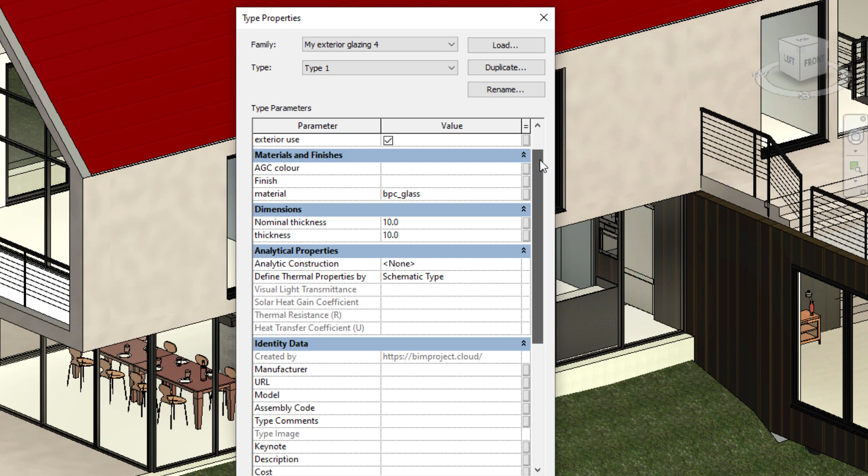Let's try to add a real Wave by AGC glass now. Switch back to the app and click on the Real Product tab. There are already some products matching our requirements, but we can narrow the results by adding some more. Let's say we want our glass to have some electromagnetic shielding index for the frequencies under 1 GHz. That should help to reduce the levels of electromagnetic smog from the outside environment.

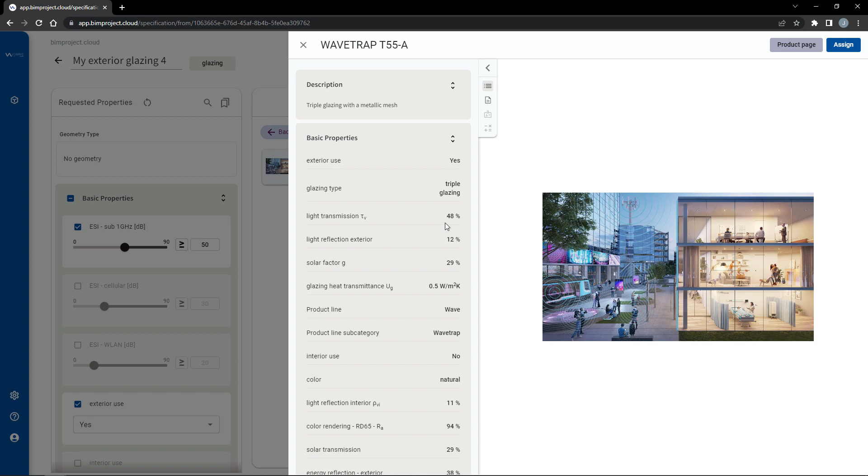Now we can choose a product. Glazing Wavetrap T55A meets our requirements, but its light transmission is only 48%. On the other side, Wavetrap T49 also meets our requirements, but its light transmission is higher. Let's assign this type of glazing. We can now replace our previously created glazing with the assigned product.

Click the Add to Project button and select the Replace Selection option. I don't want to replace the full Revit family, so I select the option to just replace its type and proceed with the Replace Selection button. After switching to Revit, we should see that our generic glass was replaced by a Wavetrap product. It should also contain all the product information now.

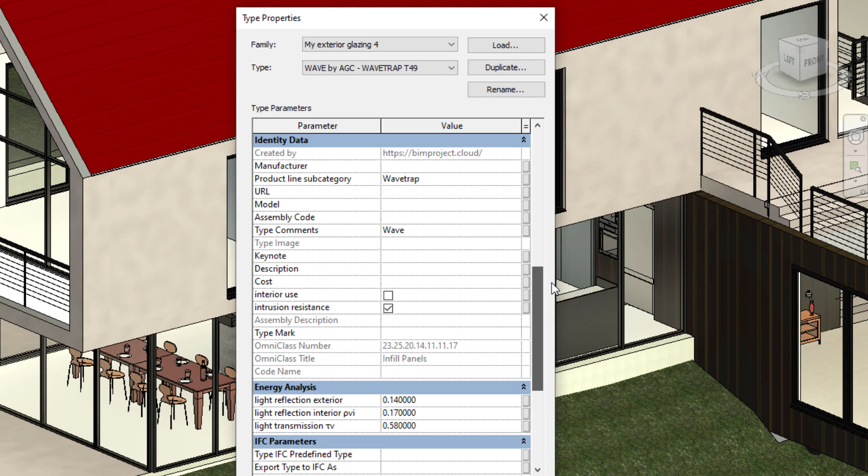Let's explore the parameter mapping feature. Switch back to the app and save the specification. Go to Settings and switch to the Integrations tab. Now click the New Preset button and choose a name. Continue by uploading your shared parameters file.

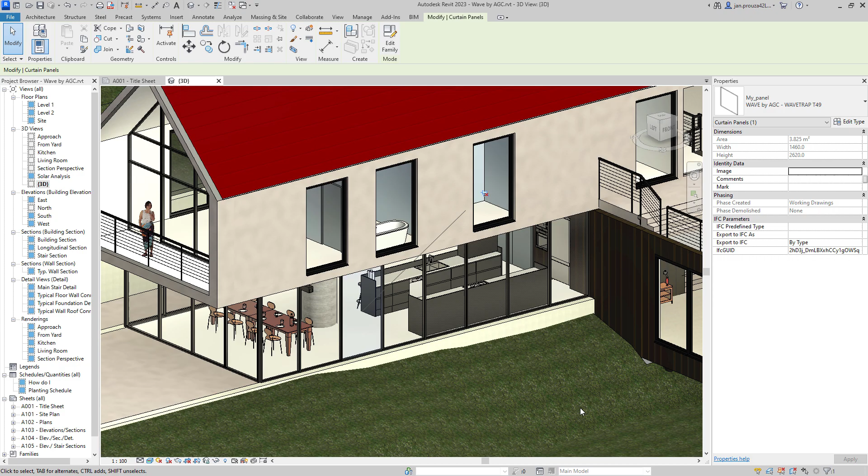The app should load all contained parameters and sort them into the groups. You can now link bimproject.cloud parameters with yours. After finishing the setup, click the Save button and don't forget to activate the preset. Now, when you go back to the previously saved specification and replace the glazing in Revit, you can see that the product parameters now changed according to your mapping preset.

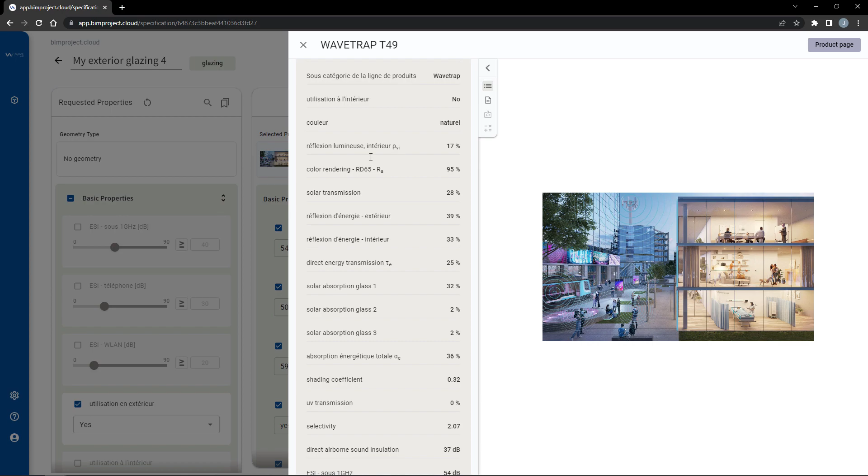Finally, we will explore how to change the language. Switch back to the app and navigate to the settings. Change the language to French and navigate back to our specification. You can see that the parameter values are now translated. Continue by clicking Add to Project button and replacing the glazing in Revit. You can notice that the parameters of our product are not only mapped, but also in French.